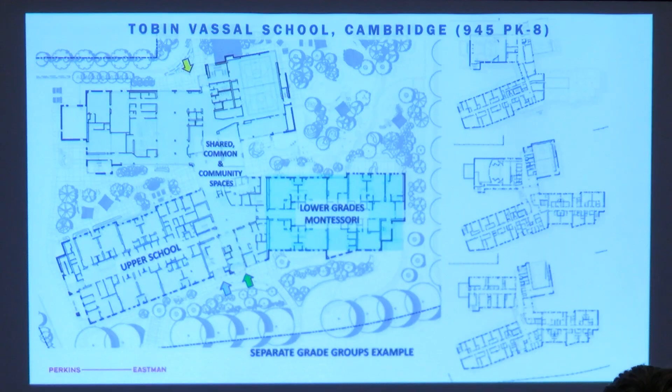This is an example, a school in Cambridge, the Tobin Vassal School, and what you can see here are two separate schools within the school. They actually have separate entries, similar in that it has shared common and community space in the middle, but a very different wing, schools within a school in this case, for lower grades and upper grades, and that's done horizontally.

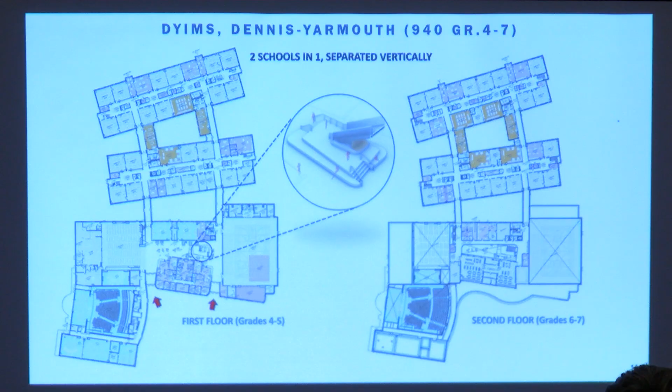This is another example of a school in Dennis, Yarmouth, Massachusetts. Here, this was two completely distinct schools with separate administrations, and that zoning happened vertically. So the lower floor was for grades 4 and 5, and the second floor was for grades 6 and 7. So the 6 and 7 students, as they entered, would have a main stair to ascend up to their school within the school.

This is an example from Hopkinton, Massachusetts, of a neighborhood cluster. Here, the school was set up with 3 distinct wings. They could be different grade levels. It was actually set up so that the school could be organized by floor or by wing, and those are the types of flexibilities that we would hope to build into this school, so you're not locked into one organizational model, but it can work in different ways. But you can see within each wing, there's a cluster of classrooms with integrated special education.

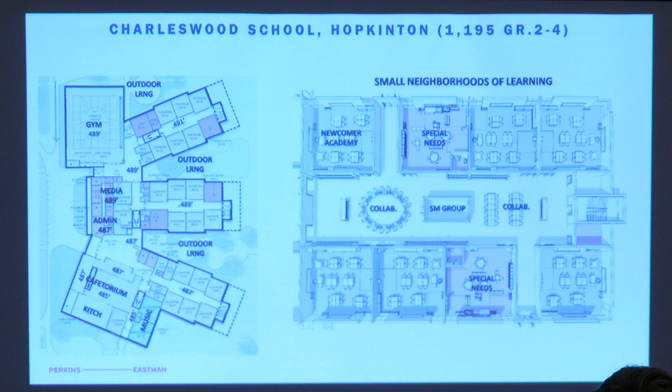In Somerville's case, also newcomer academy classrooms. They have some small group space as well as some collaboration space, so it really creates kind of a community within the scaled community. So we know that the small scale really matters to make children feel at home and comfortable.

As we look through the grade level changes from pre-K to 8, developmentally, there are such great differences in the scale and the types of spaces that foster learning at the early ages through discovery and play, and as students move along through more collaboration and working together. It's a good reason to organize the school differently so that we can develop it age-specific.

These are just some examples from the outside. These are all 3 to 5 story school buildings broken up in different ways with attempts to scale them down. Some of them are large high schools, but the idea is to both accommodate a little bit of scale at the outside of the building, but really focus on the experience entering the school and the students' daily life within the school as a scaled experience.

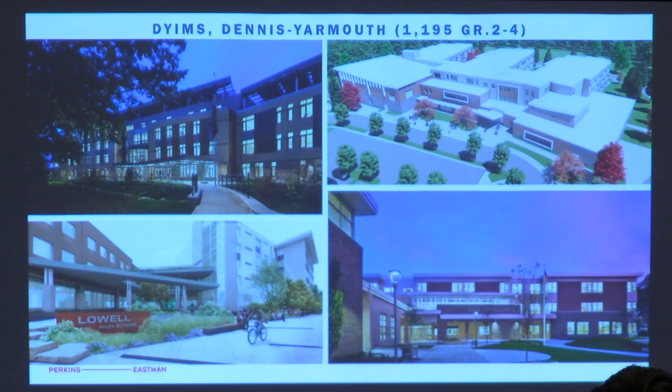Aside from scale, we wanted to cover some of the sensory and universal design approaches. Designing for different cognitive abilities, as well as physical, social, and emotional needs, is really just good design, designed for all.

Studies show that curves and gentle sweeps, or widening at intersections, can be a mental relief rather than sharp angles or sudden turns. We also know diversity of space and providing choice, even in a large room like this, to have a quieter space, is important. But too much choice can be overwhelming, so there's a balance.

We also need to support sensory sensitivities. Acoustics is probably the number one sensitivity common among those on the autism spectrum, but quality lighting, consistent lighting, acoustics, and thermal comfort are all very important. Lastly, tactile surfaces and good orientation, knowing where you are in space, in place, in time. Touch mapping is very important for some students to know where they are in a physical environment.

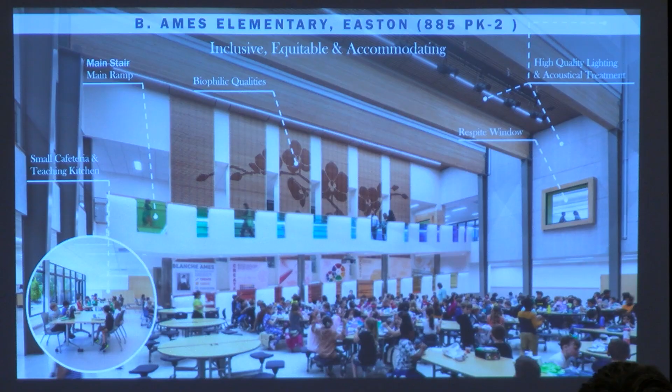And then, of course, purpose-built spaces. The wonderful thing about a new school is it's not a compromise. Everything is built very purposefully, thinking about flexibility, the future, and the accommodations that all children need.

Finally, community space. This has been really exciting, every meeting we have new ideas coming up about how to make this a community-friendly, complementary facility and campus. This is an example in Easton. You probably can't tell, but there's a lot of connectivity here.

The main lobby has an after-school program just off to the right. Straight ahead is the cafeteria and performance space. Further down that corridor are music rooms that back up to the stage, and then a gymnasium that can be opened up separately or independently for community use. There are layers of shared and community spaces in this design.

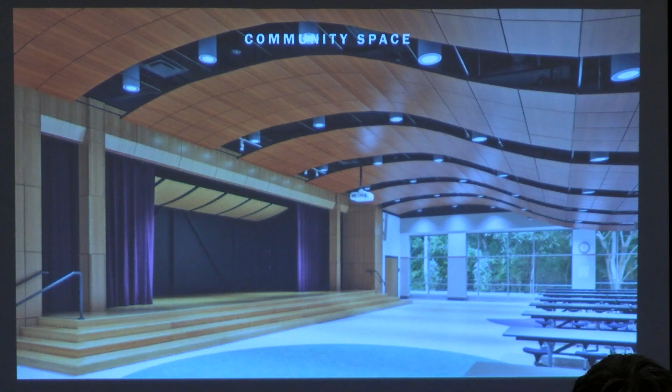This is a look at the cafetorium in that space. When you think of a cafeteria and a stage, it's probably not what you're imagining, these are really acoustically well-designed spaces for performance. Whenever we can, we create connections to the outside for orientation, bringing in biophilic qualities that have a calming effect.

Even in a large gymnasium space, we see a need for alternative spaces within it, whether a walking loop for students who don't want to participate in group activities, or adaptive PE and other activities that can feed into the same space.

And of course there's a variety of outdoor spaces, whether outdoor learning labs, outdoor classrooms, sensory gardens, or performing spaces. This example, from Dennis Yarmouth, shows a stage that opens both inside to the performance space and outside, so there can be outdoor performances. We don't have wetlands on this site, but that's always an opportunity for outdoor learning, and there can certainly be butterfly gardens, pollinator gardens, and many other features.

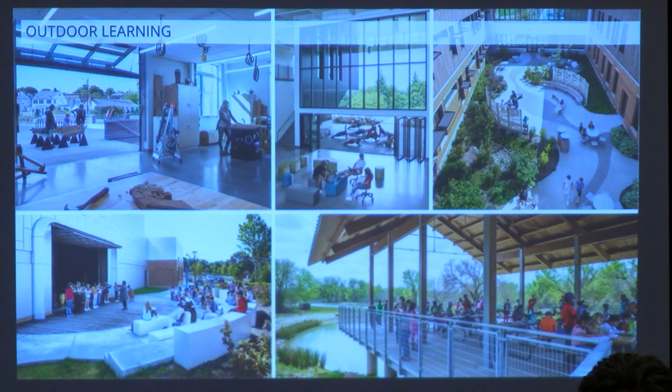So with that, I'll let Dawn come up and walk us through some of the plans we've been focusing on. Oh, traffic, sorry, our traffic engineer could not make it tonight because of the weather, traveling from a far distance. I didn't even think that was a joke, but yeah, it should have been planned. He will be at future meetings, and I know this is a really important topic for all.

Now I've got control. All right.

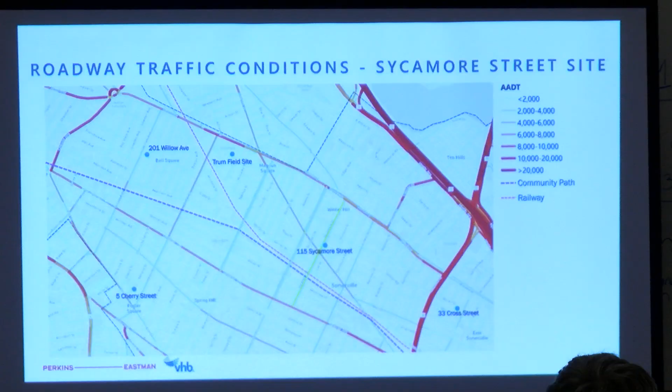These are just some images of our work ahead. There's a lot of departments that we'll be working with throughout this process to make sure that we understand all of the policies and requirements as we develop the new design.

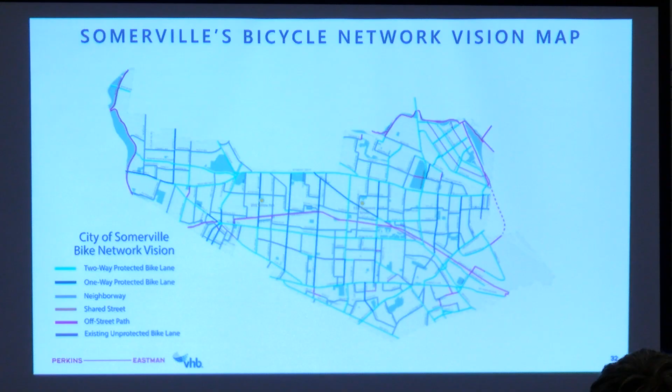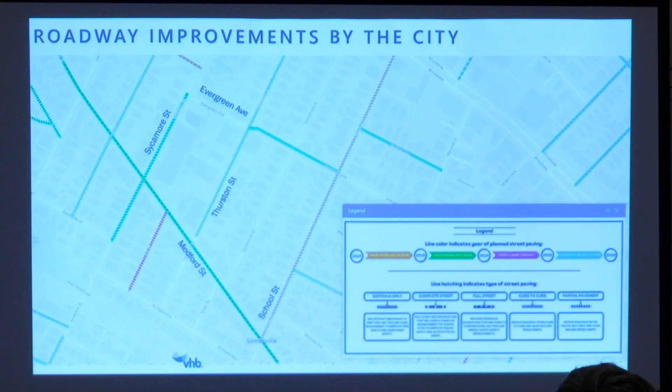So jumping ahead here, this is an analysis we were looking at on the city website, showing the evolution of where the city would like to bring the bicycle network. Once again, something we want to understand and be a part of as we start to make these connections into the new school, and same thing with the city's plan for roadway improvements, making sure we understand the work the city's already put into some of these studies and work with them on the new project.

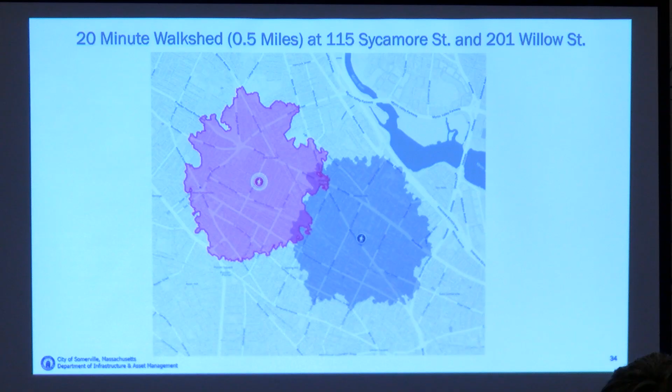This is a past study done on the 20-minute walk shed, about a half a mile around 115 Sycamore Street and 201 Willow Street. What some of these studies showed was that students at 201 Willow Street, about 50% of them are within that 20-minute walk shed, and a little less than 50% are outside of it. Whereas at 115 Sycamore Street, a majority of the students going to school there were well outside of that 20-minute walk shed.

This is an analysis of some of our work as we start to look at 115 Sycamore Street, trying to understand areas that could be potential drop-off pickup areas on Sycamore Street, Evergreen Ave, and possibly a portion of Thurston Street, but really trying to stay away from the busier street on Medford. As we start to evolve the design, we'll learn a little bit more and understand where these drop-off pickup areas will work out best.

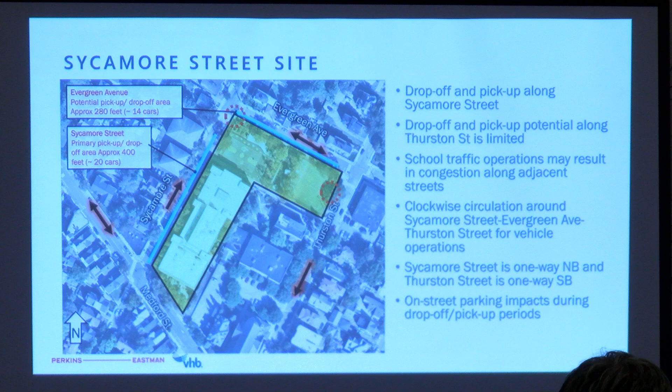But overall, just want to let everybody know we are very early in the process, and this is a collaborative effort between all of us. At our walk and talk last weekend, we heard a lot of great feedback from the abutters, from the people that had students in that school previously before it closed, and that feedback really helps us understand the issues so we can continue to work together and come up with the best resolution for the new school design.

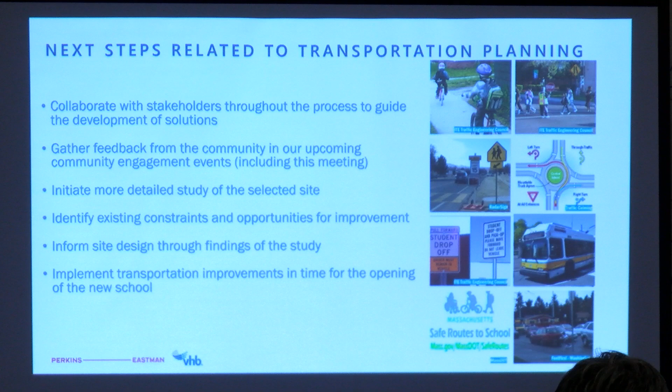And with that, I'm going to hand it over to Dawn to talk about the preliminary plan options.

Thank you, Lisa. Again, my name is Dawn, I'm one of the designers at Perkins Eastman. What we're going to highlight tonight are just a couple options of focus. The Mass School Building Authority process requires a wide breadth of options and variety of test fits. What we're showing tonight are the ones that we're focusing on. I'll share some commonalities about them, so I don't have to repeat it during every option.

There are three options, and they all build on each other. They will all meet the vision and goals that Bob described. They all reflect the 925 enrollment that the mayor mentioned earlier. They are all on the 115 Sycamore site. They'll all be universally designed, as Bob mentioned, and include indoor and outdoor community spaces for the neighborhood and community use, which we'll highlight in each of them. They'll all include integrated special ed, and they're all going to create those small communities that Bob mentioned, giving us the opportunity in the pre-K to 8 enrollment grades to provide a unified but distinct experience for each of those different grade areas: early childhood education, lower, and middle.

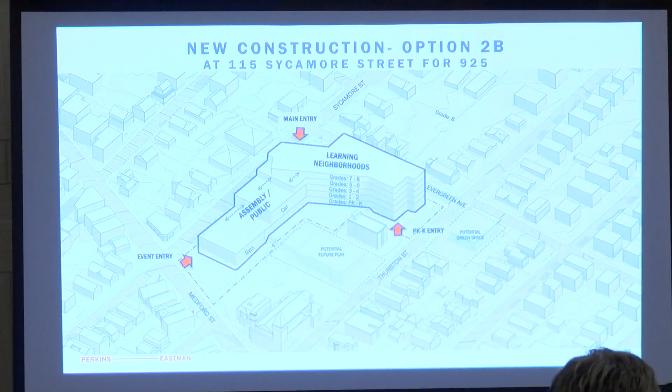So with that, I will get into the options. First is 2B, and like I said, there are others, so that's why the numbering's a little off. This is a variation of what we did in our interview when we were trying to win this project. What we have is a perfect solar orientation for all of the core academic spaces. On the north side, you can see the learning neighborhoods, the vertical block, it's 5 stories.

It's basically 2 grades per story in this particular option. What that does is create an east-west axis that provides north and south daylight and solar exposure. When we are planning buildings as best we can, that is what we try to provide. So that's where we focused here, with a terracing of the community spaces that heads down Sycamore towards Medford Street.

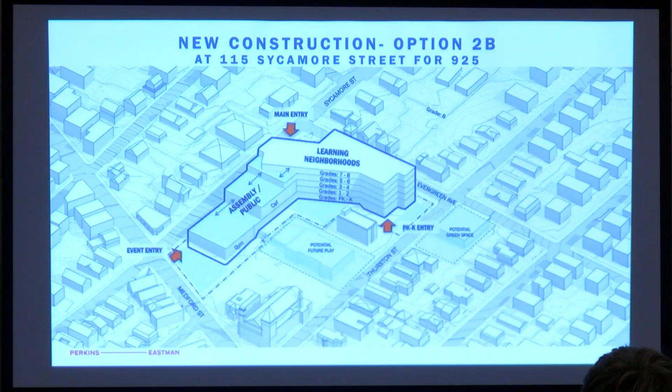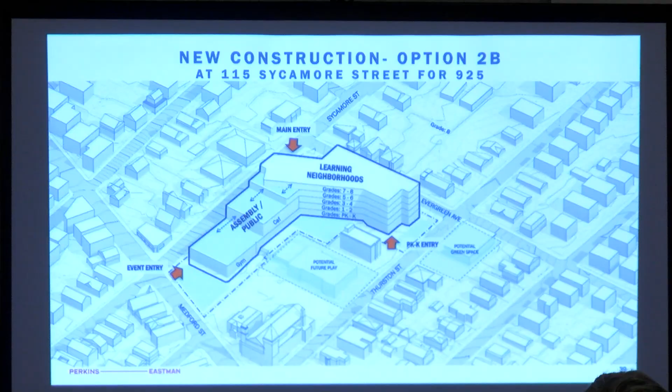We've got at-grade outdoor space, and also some rooftop space that's terraced over those community spaces. So there are 3 entry points. In all 3 options, the main entry is at Sycamore and Evergreen, on the north side.

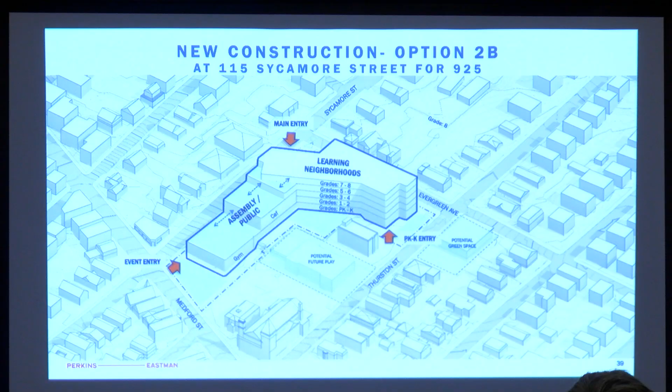In this particular case, there's an outdoor plaza that invites the students and public in, and we've got an event entry, like a community entry, for the gymnasium and cafeteria off of Medford, and then a special dedicated pre-K entry. That happens in all of them, it just moves depending on where those classrooms are. So here, like I mentioned, ideal orientation.

In all of these, the community spaces coordinate with the color scheme on Bob's bubble diagram. The yellow is community, blue is academic, red is administration, and the greens are music, art, and shared student spaces. In this case, we have 2 grade structures per floor, and the community spaces feed out to Medford.

All of them have shared collaboration spaces within the small neighborhoods that Bob mentioned in some of the precedents he showed, and you can see those land in the middle of some of these academic neighborhoods. As you go up, it becomes more academic, less community space. Those community spaces are accessible either from grade or off the main entry. The only exception being the media center, which we like to place on the academic wings for direct access for all students.

Option 3B: the feedback we heard from the school building committee is that they would like the mass of the building to be closer to Medford, with the majority of the academic wing where most of the community access and traffic off of Medford Street is, and to protect the multi-use field that would be replaced in kind along Thurston and Evergreen.

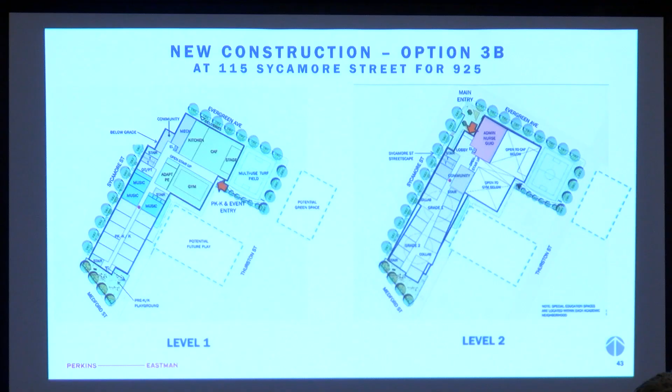So here we've got the multi-use, and then the rooftop above the community spaces. And the media center would have direct access in this particular option.

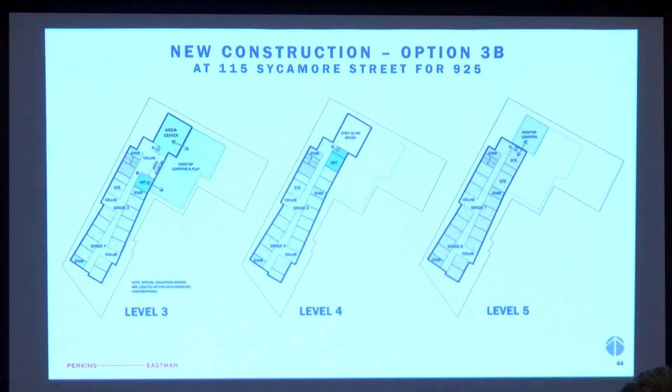I should also mention they all have a Mae's garden. We learned that that was a really critical piece of the project, and all of them will incorporate that in some manner, so it's important to note that as well.

The last option, like I mentioned, there were three. This is option 4, a hybrid, kind of a mashup of the first two. What we tried to do here was take the good out of the first option I showed you, 2B, and build on some of that. We still have some of the north-south axes, giving east-west orientation to those learning spaces, but then we also created a neighborhood to the north that does have that ideal north-south daylight coming into the core learning spaces.

What this also allowed us to do was keep the multi-purpose field in kind, so it's the same size as what's there. And then also creatively over the cafeteria, we were able to provide an at-grade area, because the grade slopes down along Evergreen. At the entry point, you can access this above rooftop area over the cafeteria. So you have sort of a two-tiered play: the multi-purpose field down at the Thurston level, but then also a rooftop, which would be protected and have security around the edge of it.

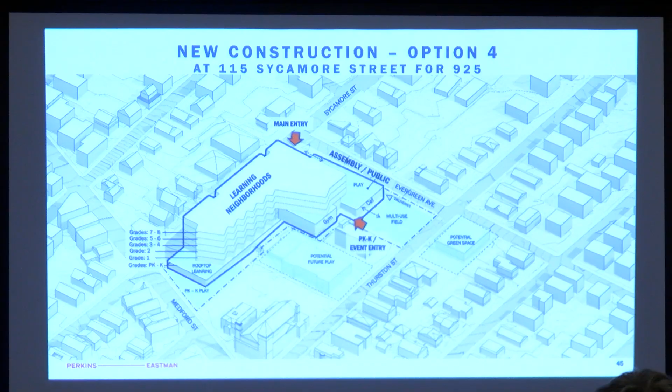That allows the entry point to have direct access for the community on the weekends to go and use that. It also has the dedicated pre-K play off of Medford, like the previous one did, with an entry point there. It's not indicated with an arrow, but it would be their direct entry point. And then a little bit of rooftop in other areas.

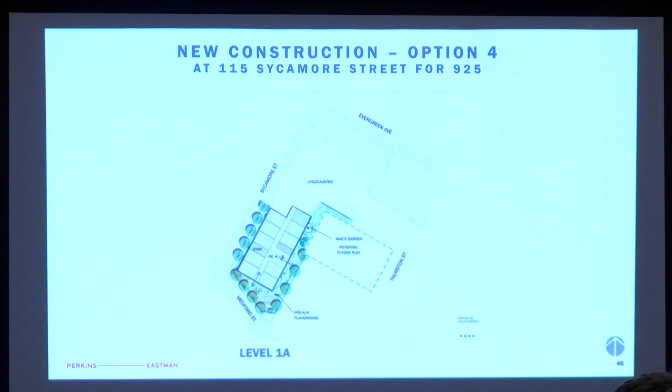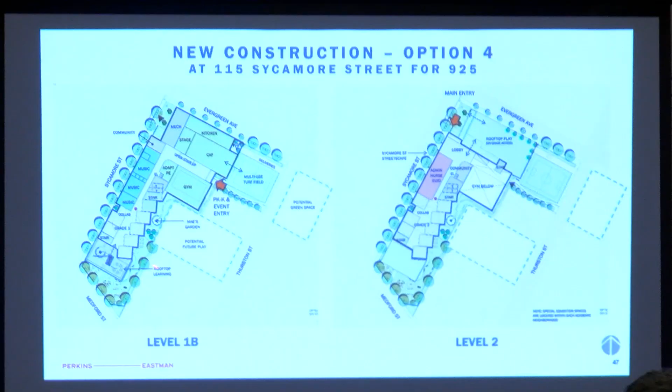So the pre-K play, I mentioned it had its own dedicated play area and entry point, and those classrooms are on their own lowest level. As we go up, first and second are split in this particular option because of how much community space there is. So you have the cafeteria, the gymnasium, all of those have direct access out to the outdoor play and outdoor areas. And then the music and art happen to be on that wing. There's a rooftop play for the first graders right above the pre-K.

I'll go back to the massing real quick, you can see that here. We have a bit of a sawtooth here, and that's intentional. Along the east-west daylit spaces, we're trying to provide southern windows so that we can control the light, and then also just have view windows out east-west that are small and protected to prevent that harsh glare in the afternoon there. The main entry is always off of this intersection.

The main office, and like I said, here's that play area that you can access right off of the corner at Sycamore, or you can walk down Evergreen and get to the multi-use field.

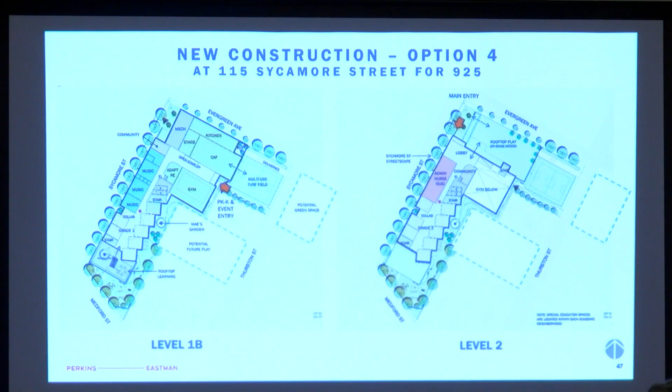As we travel up, what's nice here is we're exploring a couple different ways of having those experiences, in that we could stack 3, 4, 5 — so the lower elementary — and then go 6, 7, 8 and have the middle experience occur on its own. Or we could do 2 per floor. So we're still exploring that, having lots of discussion about the best way to lay it out, but we think it would work either way and still provide those distinct wings that students will not have to travel through in order to get to their classrooms.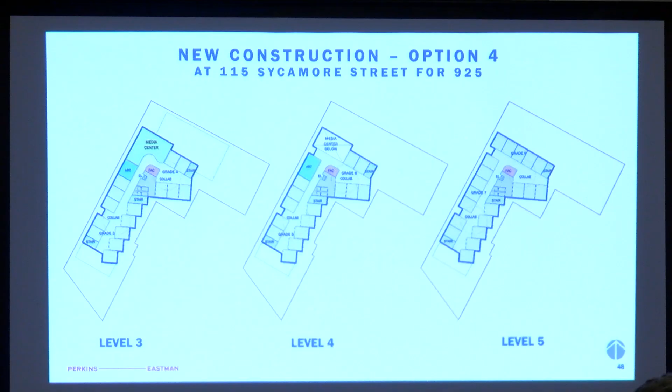So this is just an overview of the three that we talked about. I will say all of them are on boards in the corner, with the floor plans and the massing. We also have a chart with Post-it notes, and we want to encourage you — there's also a Mentimeter QR code you can scan to provide feedback. The hope is that as we're breaking out, if you have likes, dislikes, suggestions, things you want to give feedback on, we encourage you to do it either over there directly to us or through Mentimeter.

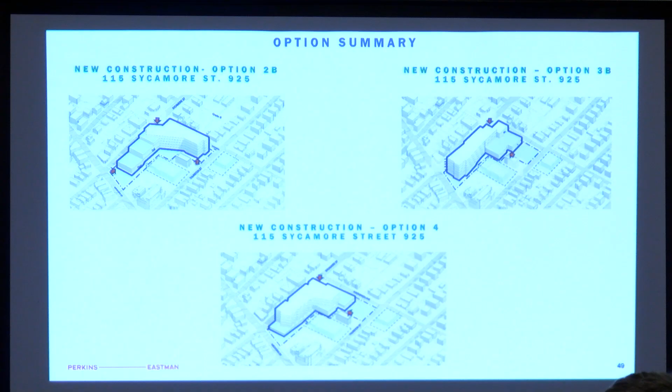So with that, I will turn it over to you to close out. Thank you.

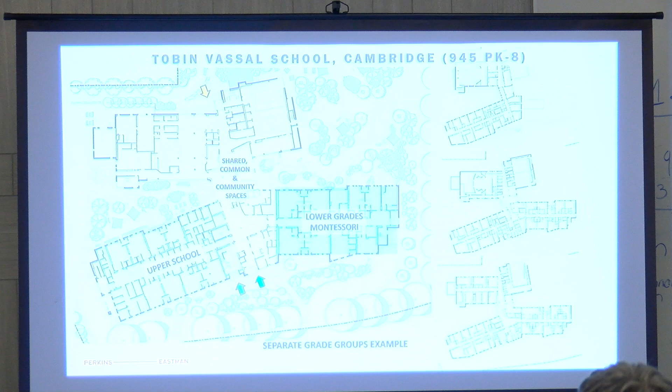Can I speak to the size for a second? Just for numbers' sake, if we add Brown students and Winter Hill students, we're talking about 600 students, approximately.

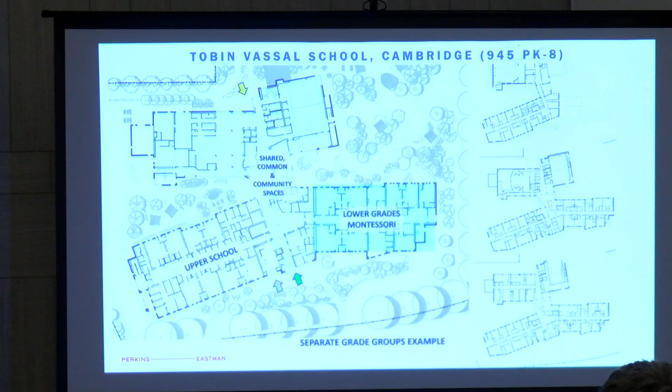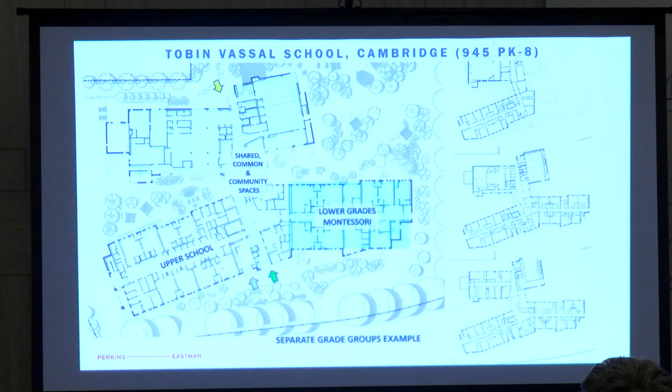And so that is the number that we have as a baseline. That doesn't mean, that's in terms of the students, right? But configuration of the space will create a space that will be built to house the students in a way that creates more flexibility.

We currently have schools close to 600, the Argenziano. We have close at 760 and change, the East, and then we have schools like this one that is at the 945 number.

I think one of the things you'll see when you go into the Argenziano, I know families often share that they have a feeling of belonging and the space feels really well configured. This location would actually be intentionally designed to separate those experiences.

Someone asked about the administration. I am committed to making sure that it only has one principal, so that might change, is that right, with the feedback I get from all of you. But the idea is having one vision to hold the school together, with different assistant or associate principals to manage the other clusters of grade level.

So within any time, you won't have more than 320 students in each of the clusters. So that scale of a small school, I think, will be achieved depending on how we design the building and how we administratively manage the space as well.

So I just wanted to speak to that. I don't know if you wanted to say something about this building, but just wanted to give you that background. If you'd like some feedback on how the Tobin School was designed, I can share that. Is that helpful? Okay.

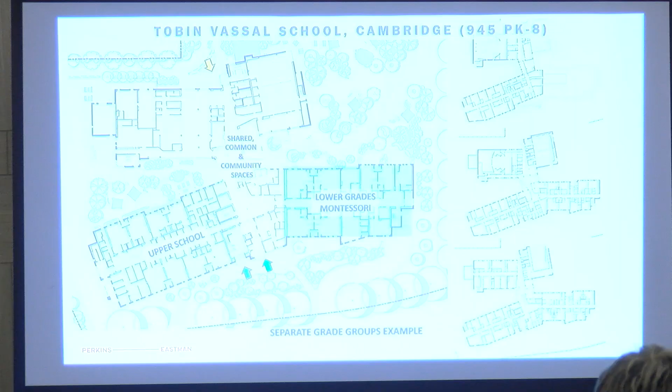So there's actually, the Tobin actually has a city preschool in it. It's on the first floor, underneath where it says upper school. That school has its own entry to the left side of the page there. That portion of the school runs completely separate.

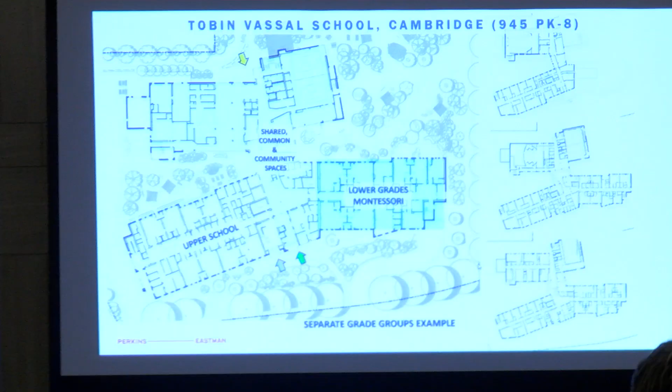I was at the walkabout the other day, and I have two questions. One is, I know you have a very strong commitment to sustainability throughout the building, and I wondered if the way the building is built, whether it's timber or concrete or what it is, is yet in play. You don't need to answer that yet.

And the other was, did you look at going to six stories in order to open up more of the ground plane? Because we talked a lot about how much the community cares about and needs the open space around it. And I wondered whether there was a reason you could not go up another story.

Nothing is really set with the design. When you walk around the room, you'll see that we actually are still working similar to what the existing building has, we're building into the hill. So option 4 actually does have 6 levels, and what that does is allow us to open up more space out in the site.

As we continue evolving the design, we can look at that. There's submissions we'll have to make to the planning board. We'll probably need to go through a special permit process when we start to look at the height of the building and how that works in the neighborhood, but it's still something we'll continue to study.